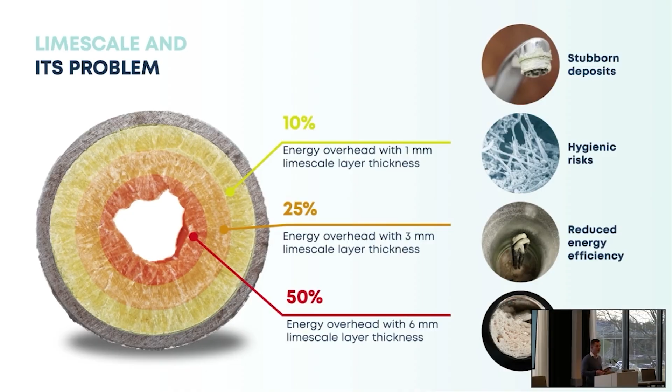Interesting is what you see on the left side: only 1 millimeter of thickness in the piping system will already make the heating demand 10% higher. Means you need around 10% more energy. With 6 millimeters, it will already be like 50%, especially in areas like where we are in Central Europe, but also in the US. And in other markets in coastal areas, you quickly have that kind of deposit over a decade.

So with these 3 patents, we have endless potential, especially nowadays with topics like PFAS removal, and for sure also detection, but also the removal is essential. So we have the position that we can filter the limescale with this decalcification technology and also remove PFAS, microplastics, pesticides, and so on. So this is the combination of these cartridges at the point of use and also at the point of entry, the 2 different models which are developed by us.

That's an interesting topic because usually, a lot of companies and especially consumers and household owners have ultrafilters or activated carbon filters or conventional, obsolete water softening, which are not able to do this. A few companies claim they can remove PFAS, but most of them can only claim the long-chained PFAS and not the short-chained. But in the classification, it's not really differentiated whether it's short-chained or long-chained. So this is why you really have to be questioning whether the short-chained are really filtered out or not. We have third-party approval to do that.

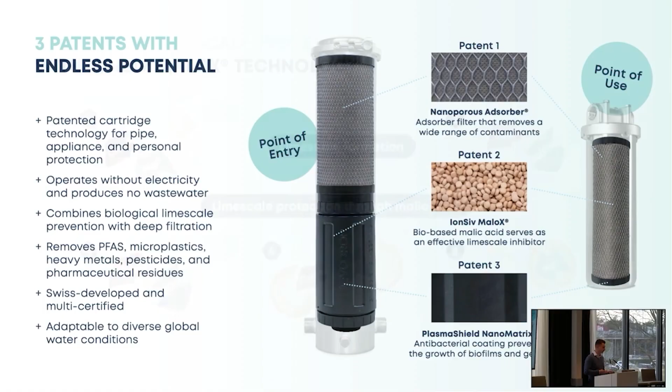The interesting topic is also that you don't need any wastewater, but I will come to that point later. And also it doesn't require any electricity or chemicals. This is the IonSiv MaloX technology with this Malic acid you have seen, the granulates you see here on this slide. We have some samples at our booth where you can test it by yourself. Then it's really a simple way of demonstrating how decalcification can work.

So usually you have the combination of calcium and magnesium in the water. They combine with hydroxides and carbonates; CaCO3, calcium carbonate, is the most common, and then you have magnesium hydroxide. And the Malic acid, which you see on point 4, is complexing and chelating around these minerals, which means we do not have to remove the minerals. Through that chelating and complexing mechanism, the minerals do not create any deposit. They stay bonded even through stagnation, even if heating or boiling up to over 100 degrees Celsius is happening.

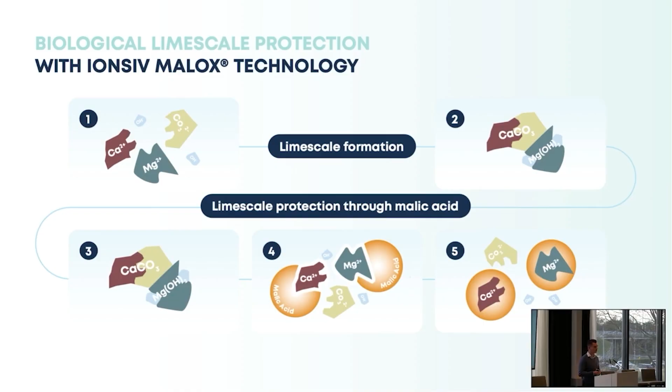The benefit is that you do not remove the essential minerals like magnesium and calcium from the water. You don't have a flat or different taste like you have when you soften the water, because then you replace magnesium and calcium with sodium, mostly, or potassium.

Yeah, it's one principle and infinite potential, as you can see from coffee machines, from showers, from RO tabletop machines, from pitchers, from ice machines, from tea and coffee and dishwashers.

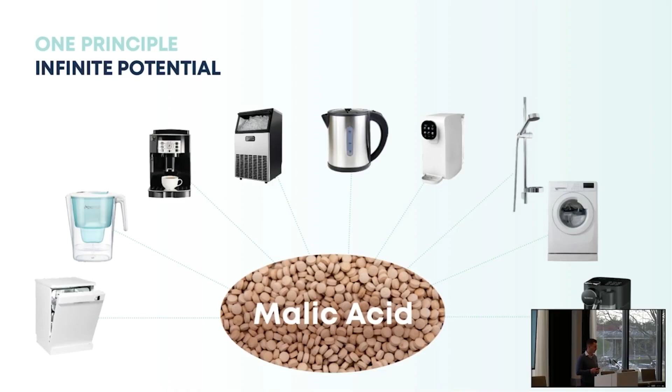The potential is huge. Because usually, as I mentioned before, water softening is used, so ion exchange. It works as I mentioned before with sodium, so it replaces the mineral with sodium. So these are the huge ion exchangers. The small ones just remove the calcium and replace it with hydrogen ions, and this is why it then turns corrosive, and the pH drops down to 5 or 6, which here is not so extensive.

Here I want to exemplify a little bit more in detail our filtration. On the left side you see the conventional carbon block system, which has mostly macropores. So the macropores are the element which makes it happen that a carbon filter can adsorb. So it's not absorption, it's called adsorption. And through this adsorption, you can remove or filter pollutants.

What usually is not possible is heavy metals, for instance. A lot of activated carbon filters cannot remove heavy metals, especially also not short chain PFAS and so on. And on the right side, you see our Nanoporous Adsorber. And here you see most of the elements are micropores.

They are around 2 nanometers or smaller and are in a special wet spinning process formed into a fleece and layers, which are connected with our PlasmaShield NanoMatrix, which makes it possible to even remove heavy metals without the combination of KDF or other resin media.

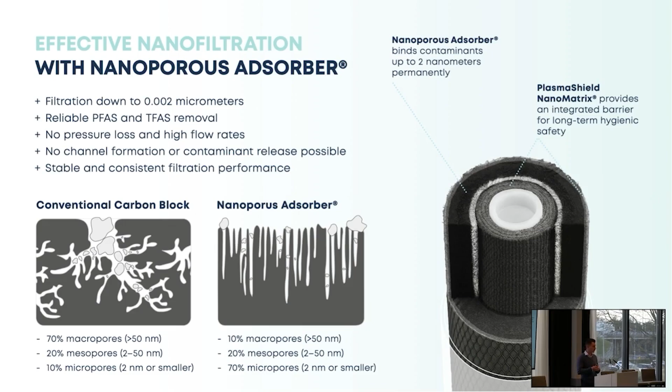But with that technology, you stay germ-free and without biofouling, because there's a redox potential inside and on the surface. This is another patent which you may remember I mentioned on the second slide. This PlasmaShield NanoMatrix creates a redox potential from different mineral layers, which is so strong that through the surface tension and touch, germs and bacteria are killed instantaneously.

Based on the affinity of the customers, we made different systems and configurations. From the left side, it's only scale protection. We got it certified, which you will see later, in a third-party laboratory where we could prove that we have 94.2% scale protection based on the NSF or the German DVGW. You need to reach 80% scale reduction to be allowed to say that you soften water.

Most of the other systems like electromagnetics and ultrasonic and so on, we also tried, because for us the maxim was to be as eco-friendly and sustainable as possible. We tried and we failed, like many others, because it's not possible so far with ultrasonic, electromagnetism, vortexing and so on to remove scale to such a percentage. It's possible, but only 20 to 30%, so you will never be certified.

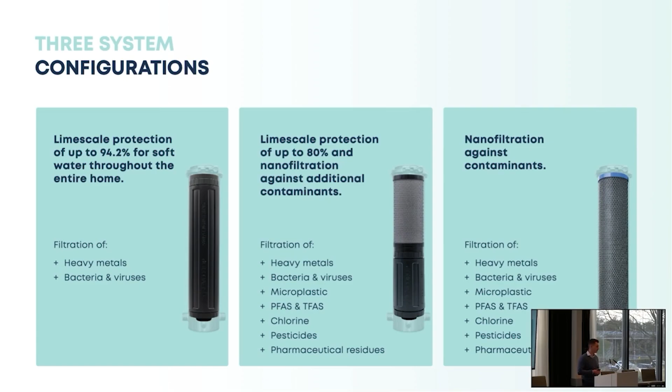And then we came across, especially because of the current situation, I don't know how it is in your countries, but in our countries the PFAS topic is very hot, and people are thinking about it. Mostly everybody knows now about PFAS in the food, in the water. So that's why we created a filtration system and combined scale protection and filtration, like a 2-in-1 version. And on the right side, we just have the filtration for people who say they don't have scale, soft water. And it's all fitting in one housing.

Here you see the different sizes, from a single house up to multifamily houses, apartments, up to large-scale buildings. It's very easy to scale up. We have bigger systems, but we do not really rely on them, because the bigger the systems get, the more complicated it will be for facility management. So we keep it safe, sound and simple for the facility management. Even a man or a woman in their senior age is able to replace the filter cartridge without any physical strength or knowledge required.

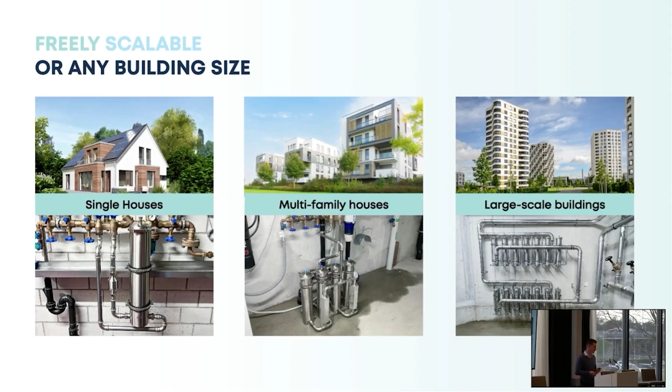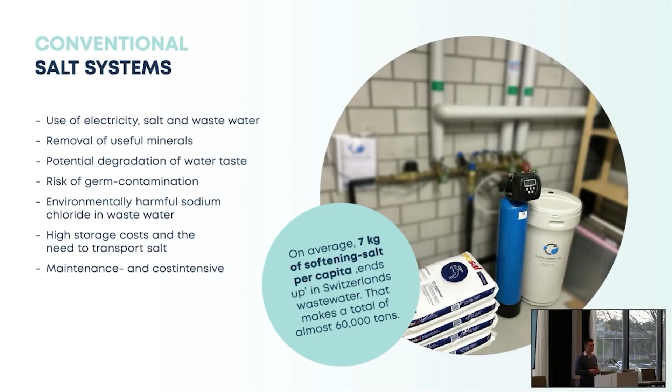Because calcium, like Ca2, and magnesium, Mg2, you need to replace with 2 sodiums. This means the TDS, the total dissolved solids, stay similar, they just replace it with sodium. And this sodium comes from the salt, which you see here in the bag. Through this regeneration, you need to flush that out all the time into the wastewater channel. For instance, California and some other countries already denied and made a prohibition for water softening systems because of all the wastewater going back into the environment, which creates a high chloride level. And as we know, chloride is also corrosive and destroys the infrastructure itself. Here, the sodium of the salt goes into your drinking water, so you drink the sodium, and the chloride of the salt will then be flushed out into the environment.

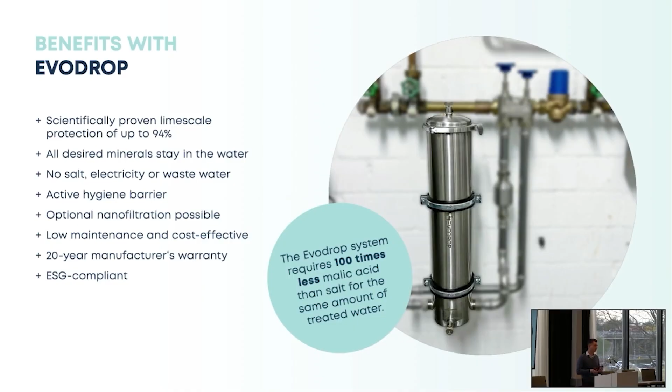And here, as you see, it's very simplistic. There is no connection to the wastewater, there is no regeneration happening. There is one cartridge, and this one cartridge makes up to 250,000 to 300,000 liters in middle hardness of water, let's say around 350 ppm of TDS. We only require 1 kilogram of malic acid for that amount of water, like 250 to 300,000 liters. Compared to a water softener, you need around 100 kilograms of salt to have the same effect. So, as you see in the blue box, we require 100 times less malic acid compared to the salt.

Here we made a comparison for a 12-unit apartment, which you see on the right side in the corner. Even though most people think, yeah, now you say something very eco-friendly and bio-based, now let's talk about the financials. Most people think that because it's bio-based, like organic food, it's also more expensive, but it's kind of the opposite.

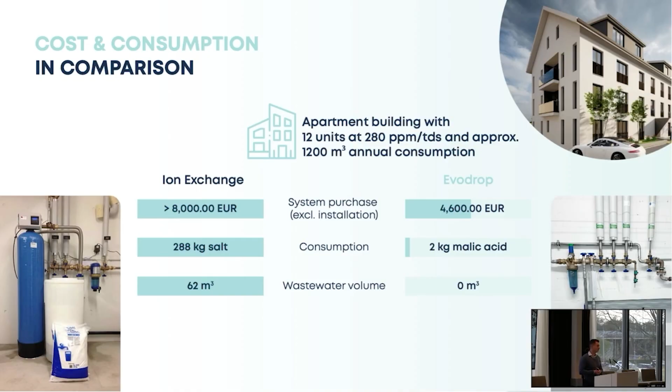As you see, an ion exchanger, usually from the renowned companies - for sure you can also source them directly from Alibaba in China and then it will never be that price - but if you have competitors which produce it like we do, then you have around 8,000 euros, and we are very competitive at 4,600 euros. The consumption, as I mentioned, here you see on the right side we use 2 of our systems installed in parallel. We require only 2 kilograms of malic acid, and the ion exchanger requires around 288 kilograms of salt. The wastewater volume is 0, as I mentioned before, and the water softeners require around 60,000 liters of wastewater.

The benefit of the comparison is also that, especially in Switzerland, and also like we have here in the Netherlands or in Scandinavia and Germany - in all these areas where we do not chlorinate the water and people drink directly from the tap - it's very essential that the taste and flavor of the water stays soft and smooth, and we do not have a change. When you drink ion exchanged or water softened water, there is a kind of flat, salty, or metallic smell, depending on how the ion exchanger works. And with us, you don't have that, right?

So in our country, a lot of people have so-called functional water with water softening. But the issue is then they don't like the water taste anymore and buy bottled water. So it's a little bit paradoxical to say so.

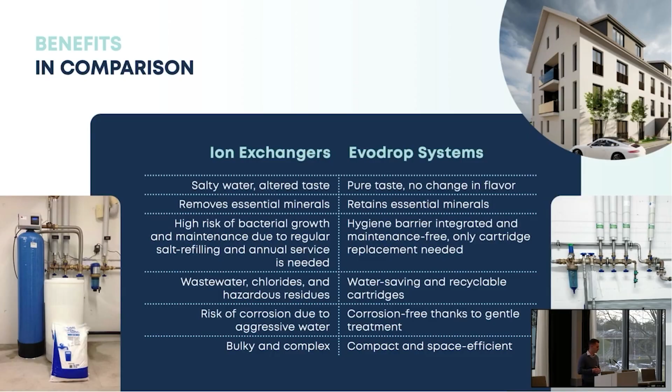There is no corrosion happening because the malic acid - yes, there is the word acid in it - but the malic acid, as I mentioned before, will be transmuted and interfere with the minerals and then creates a malate, the salt form of the malic acid, and will not create corrosion. The pK level is at 3 and something at 5.2. So if you have a stable pH of 6, 7, or 8, it will not really interfere with the pH, so the water stays stable. And there are also not any free radicals like hydrogens, oxygens, and ozone, etc. happening through this combination.

Here are 2 different test versions. On the left side is from the CTI, where we reached 94.2%. It was a little bit more of a tough test. On the right side is the German test, where we reached 100%. So we definitely reached the level that conventional water softeners require. What I sent to you, the requirement is around 80%, and at that level we are more than enough and very feasible.

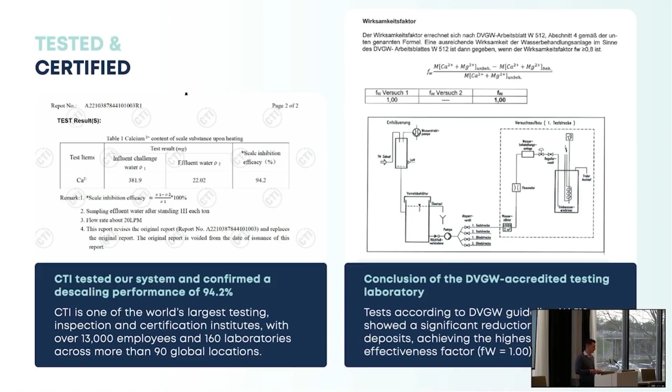Also, more and more funds, real estate management, and facility management require some CO2 savings, the ESG. You may also have the compliance of the ESG, and the policy is also changing a lot. It's also very fascinating because nobody was thinking about how you can save CO2 with water.

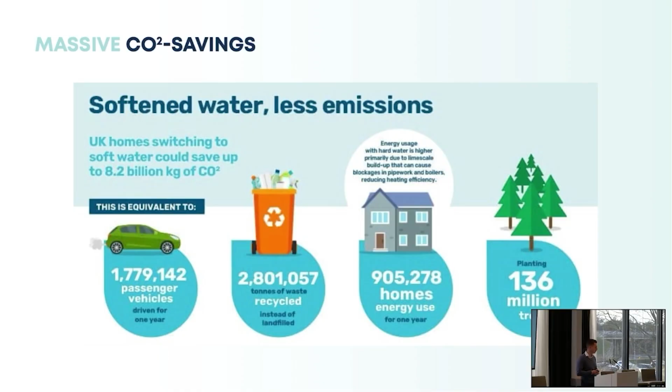Here they made a study in the UK, where if UK homes would use softened water, even with a normal water softener which has wastewater, electricity, and uses resins and so on, they could save around 8.2 billion kilograms of CO2.

Our intention was to figure out at which level malic acid can be toxic. What we found is that malic acid even helps gut epithelium and fibroblast cells grow better, have a faster regeneration, and also helps against inflammation. Some of you may know malic acid is also now a well-known food supplement.

The interesting part was that if you combine the minerals in the water, softening or decalcifying the water with the malic acid, the minerals get, for instance, calcium and magnesium malate. So they are not the magnesium and calcium oxide, to simplify it, they get the malate version.